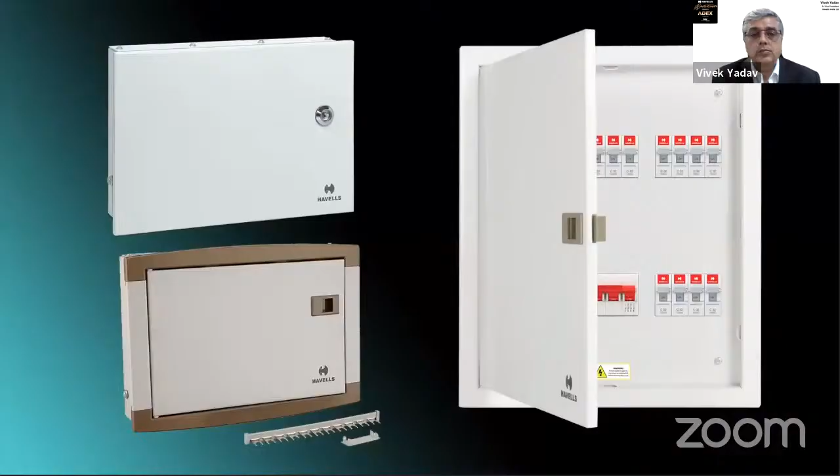For more than 6 decades, Havells India Limited has been focusing on building a better future, a future where technology is used to drive progress, improve business outcomes, and create a better quality of life. Today, Havells stands tall in the FMEG sector as a major power distribution equipment manufacturer with a strong global footprint, owing to its innovative, future-ready products for a wide spectrum of applications.

With the acquisition of Lloyd in 2017, Havells has made a foray into the high-potential consumer durable segment with offerings of air conditioners, LED televisions, washing machines, refrigerators, and dishwashers. The new synergy further complements the brand's deeper-into-homes vision. Havells owns some of the most prestigious global brands like Crabtree, Lloyd, Standard, and REO.

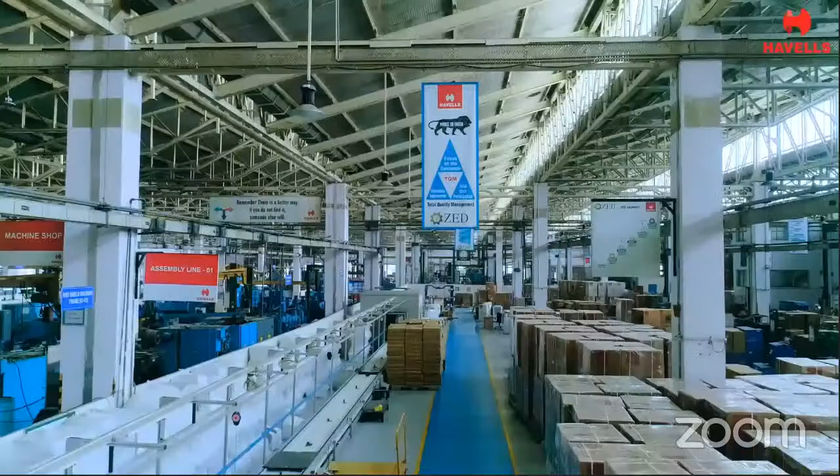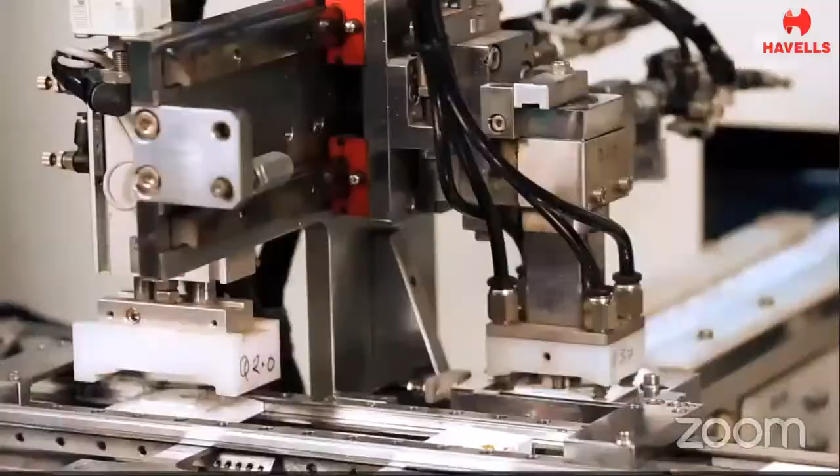Its global network constitutes over 5,000 professionals across its offices. As part of its Make in India philosophy, Havells is manufacturing 97% of its products in-house. With 14 state-of-the-art, fully automated manufacturing plants located across India, Havells offers superior quality and globally benchmarked products to its customers.

Havells has set up a large distribution network to set new benchmarks in prompt delivery and service to customers. Over 11,000 dealers, 150,000 retailers, and 700 plus Havells Galaxy exclusive brand showrooms across the country are helping customers choose from its wide range of products. Havells has a robust supply chain management system with 31 warehouses located pan-India. The meticulous forecasting and demand planning delivers a seamless tracking system.

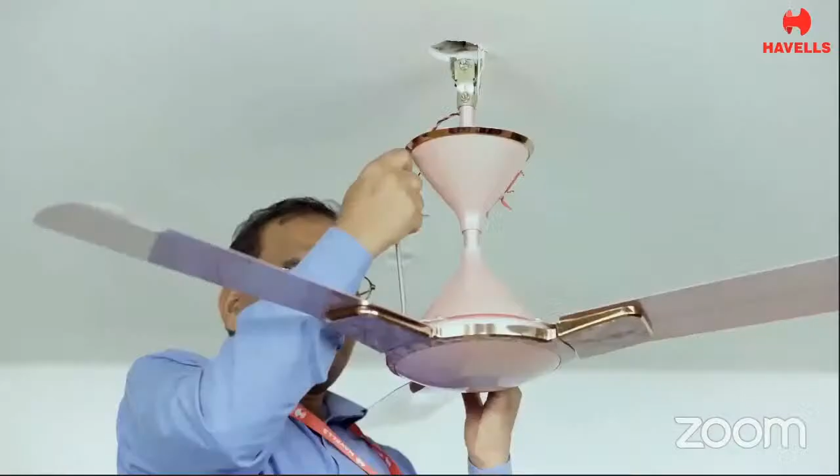Havells is the first FMEG company to offer doorstep service, offering a seamless post-purchase experience. It has the largest service network with 800 plus service points covering 441 towns, 24/7 across India.

Havells Center for Research and Innovation, CRI, at Noida, with a team of highly qualified engineers and designers, continuously works towards creating differentiated and innovative products while adhering to stringent quality norms at par with international standards.

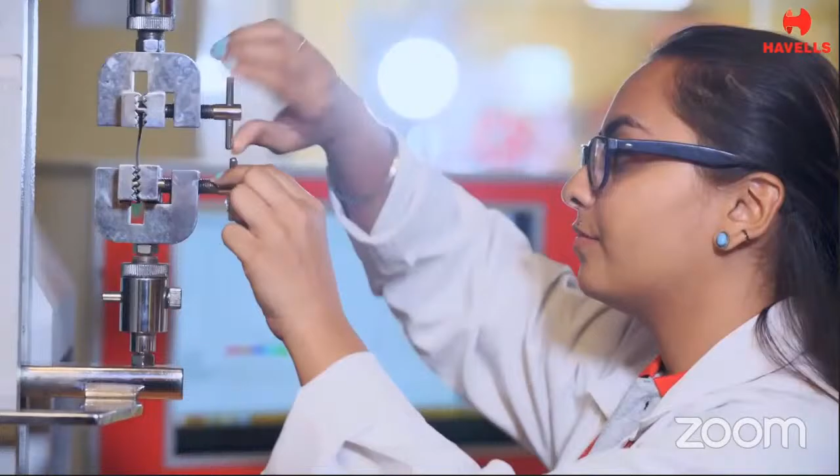Havells products are certified by nationally accredited laboratories such as CPRI and ERDA.

Havells has a strong in-house IT vertical which develops innovative technology platforms to support its robust service and supply chain management system. Growing together is ingrained in the ethos of Havells, and this has resulted in launching many innovative and profitable schemes for its dealer community.

Havells has strong credentials in B2B and large government projects as well, such as lighting up Kolkata railway station and partnering with NBCC India Limited to beautify and transform the night view of India's heritage monuments like Humayun's Tomb, as it believes in the philosophy of spearheading the progress of the nation without ignoring the past.

Havells has taken giant strides to create an innovative world full of possibilities, not only for itself, but also for all its channel partners and customers, with a commitment to improve people's lives and help create a better global society. Havells is inspiring the world and making a difference.

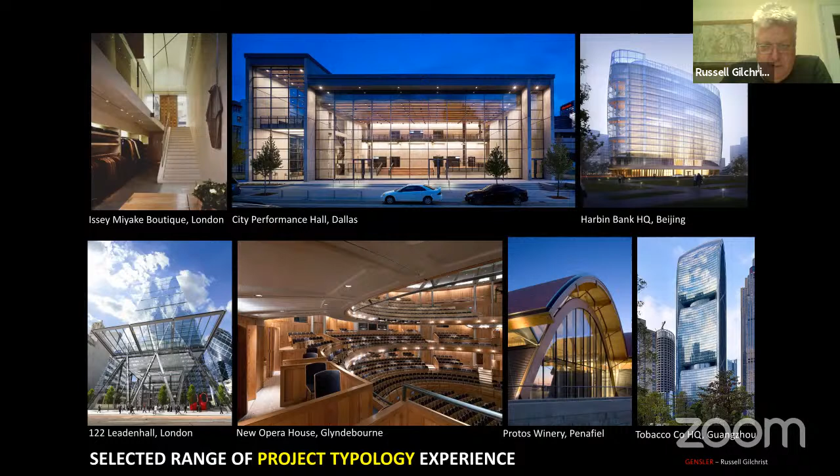I thought I would include this slide because I hadn't quite realized that I'd been repositioning buildings for some time. So when I was a very young architect in the mid-'80s, there was an old tobacco warehouse in London, Butler's Wharf, and we converted that into a design museum. It's since moved from there, but that was my very early foray into repositioning buildings.

Another building was not a landmark building, but it had a very interesting terracotta facade. This was a competition at the time. We were one of 6 architects to compete, and our solution was the only one that retained the facade, even though we didn't technically have to. We kind of saw it as a very characteristic building, one that people had a history with, and we didn't see that we should knock it down if we could protect it, keep it, and build around it.

Repositioning work takes many forms. We're doing a lot of project work in Chicago where we're repositioning lobbies that were maybe 30, 40 years old and need a refresh, and we're doing tenant amenities.

I've currently got one just under construction now in Detroit. It's an old book depository building where they stored books, naturally, which is actually a project for Ford, for some of their incubator kind of companies. It's a 3-story mini version of the post office, much smaller, but similar challenges. That's an ongoing project that should be complete in about 18 months.

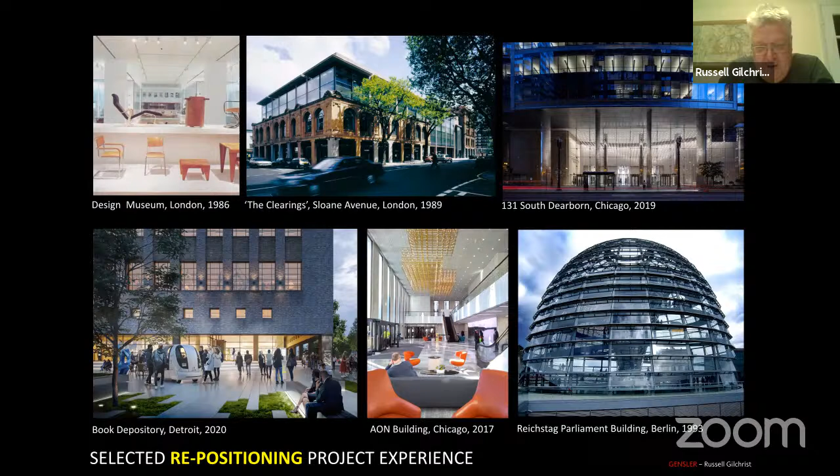Also, I think Sapna mentioned this, I had a brief spell at Foster's where we repositioned the Reichstag into the Parliament building, the current Parliament building. So again, very varied experience.

But I want to talk to you about the old Chicago post office. We call it awakening a sleeping giant. The Chicago practice of Gensler is also repositioning the Willis Tower, which is literally across the water on the other side of the river here.

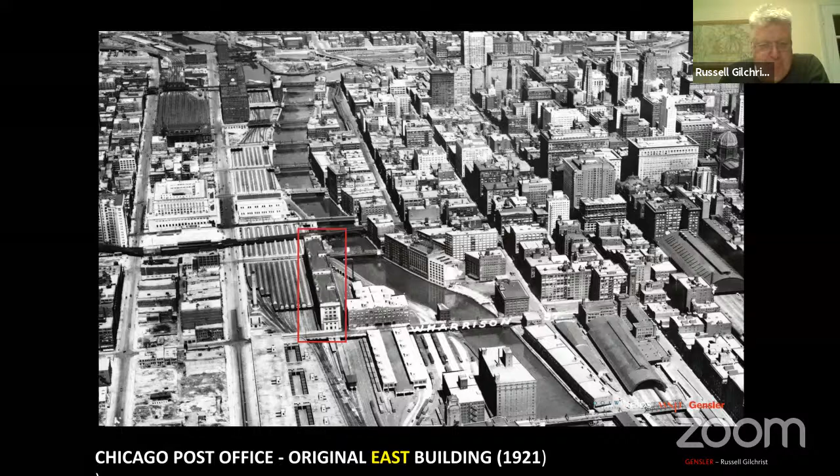But there were 2 later additions, because the post office is in fact actually 3 different buildings. There's an East Building, a North Building, and a South Building. Again, more of that later.

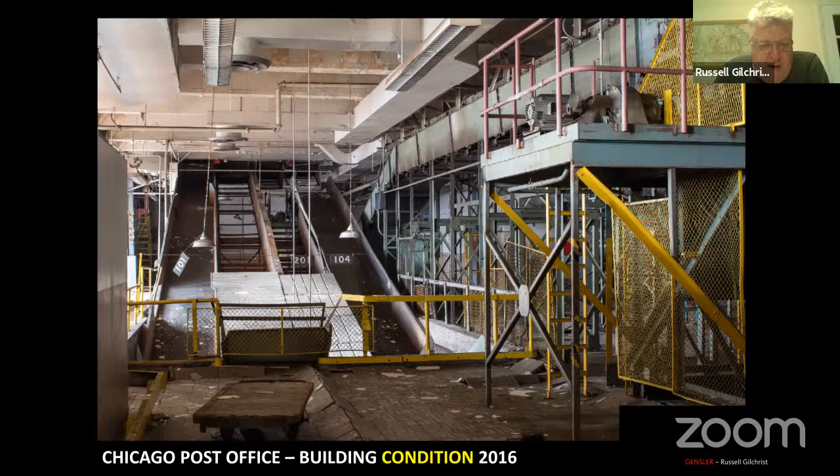We also inherited a lot of scrap metal in this project. As you can see, there was a lot of equipment that was just left there. You can see the kind of state that the building was in.

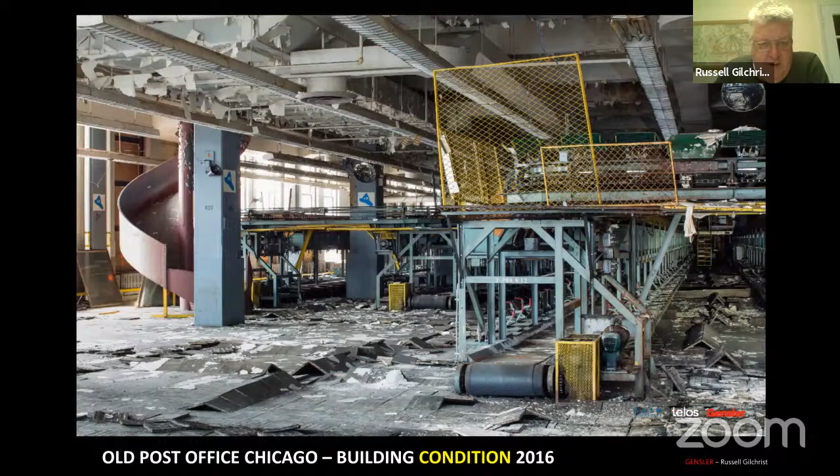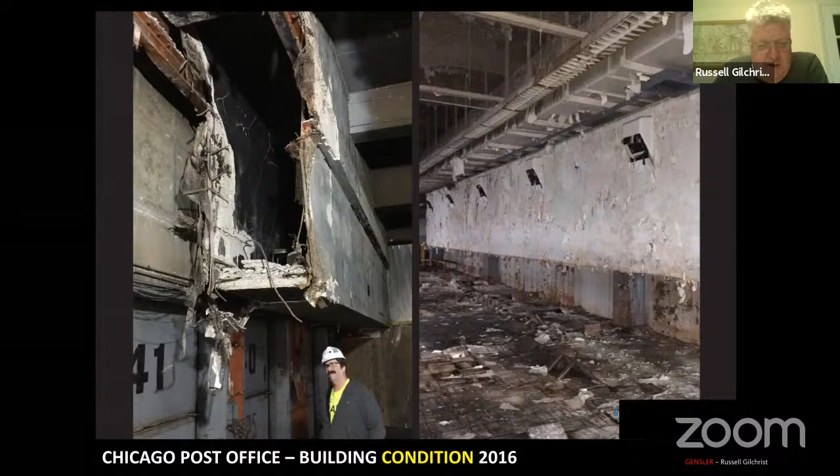Landmarks Illinois and the National Parks, who control how much preservation we have to do on this project, were very keen for us to preserve exactly this and the historical relevance of some of these features, even though they don't really have any great significance in terms of commercial office space that people want to lease.

Again, you can see a lot of water damage. These are actually timber floors that have curled up because there was so much moisture and mold in the building.

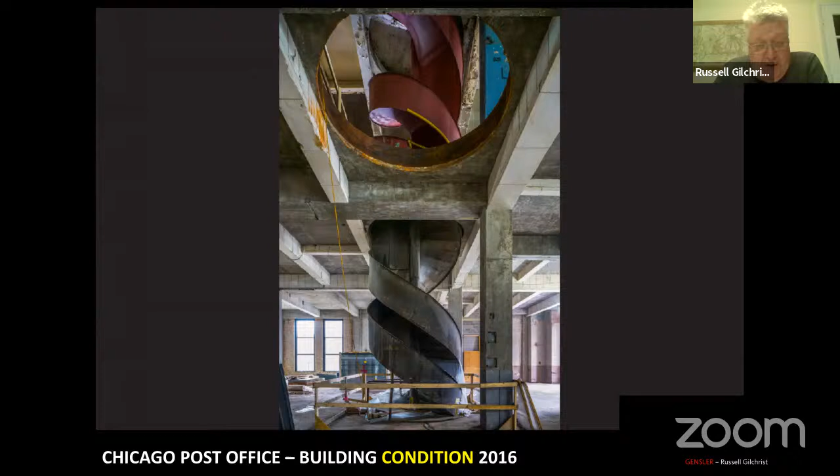Lots of connecting spirals—it was a postal sorting office after all. So the quickest way to get packages sorted from one floor to the other was to use these chutes. Some of these chutes we've actually accommodated within the building, again at the request of the National Parks and Landmarks Illinois.

The guy on the left was actually our construction manager—he's standing on some scales. There were a lot of artifacts, and we were going to have a museum of some of these items. We scrapped that idea in the end, but we are keeping some of the artifacts that existed in the post office building.

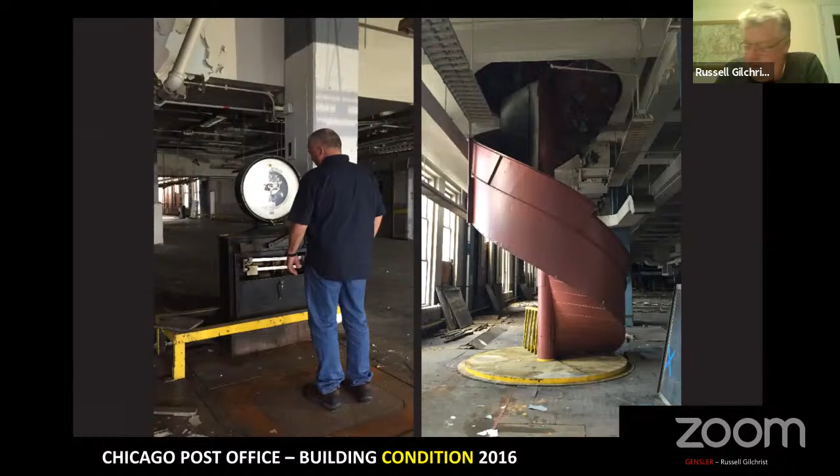One thing that does remain intact is the old postmaster suite, a relic from 1932. It was in remarkably good condition and needed very little renovation, but it has been renovated and upgraded. This is actually in the north building, which we call the admin building. The south building was mainly big sorting office floors, and you'll see when I come to a section in a moment the relationships of the various floor levels, because not many of them match up or are contiguous.

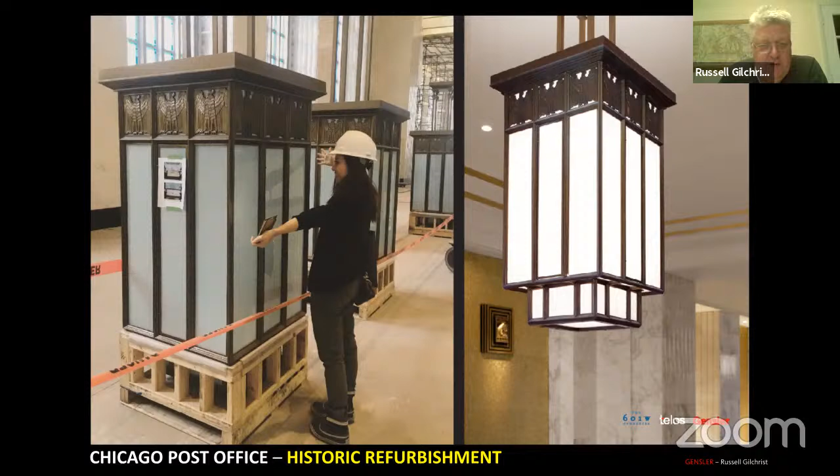This is one of my Gensler colleagues. We had to completely rebuild the light fittings, pretty much from scratch. You can see they're pretty big, but they've been fully restored in this space. There are lots of little artifacts, as you'd expect from a 1930s building—a series of plaques, originally done in gold leaf, showing the various forms of transport.

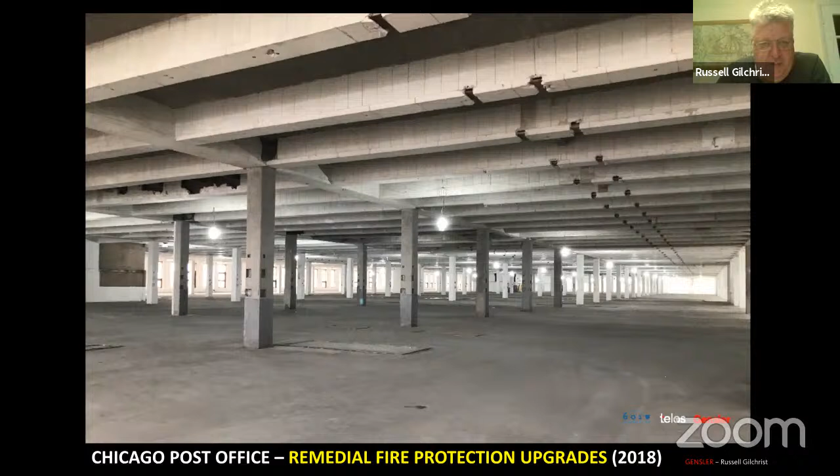This is one of the refurbished galleries, prior to being refurbished, but cleaned up. It's actually been repainted now and looks a bit better than this. These were one of the galleys adjacent to the north building that we had to keep.

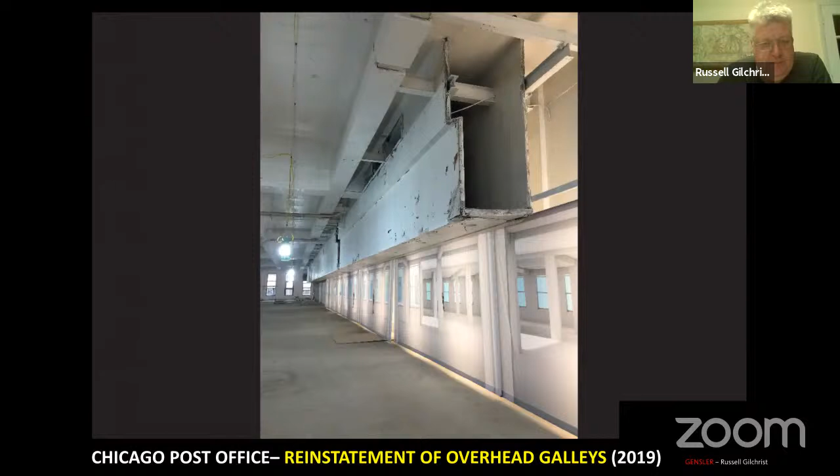Here you can see some of the windows. Again, this is in the main sorting office, a 19-foot high space. The actual bones of the building, when we dried it out, was in pretty good condition.

But our building services engineers reckoned there was enough moisture in the fabric of the building, the brickwork and the concrete, to fill an Olympic-sized swimming pool. So it took us about 6.5 months to dry out the building. At the time, there were no windows in it. We had fans in there, and we were just trying our best to dry out the building.

There's over 2,000 new windows. Again, Landmarks and the National Parks insisted that we match the existing profiles of the original 1930s windows, which is pretty tough because they were steel and single glazed. But we managed to get within 1/8 of an inch, or 3 millimeters, of the existing profiles in aluminium, and they're obviously double glazed. They're not operable because that would have affected the internal building environment.

And just to give you - sorry, this is an American football field, so not a soccer pitch - but this gives you some idea of the scale of this building. You can put 4 NFL football pitches on top of the roof. And I'll get to the roof a little bit later on, because we have actually landscaped it.

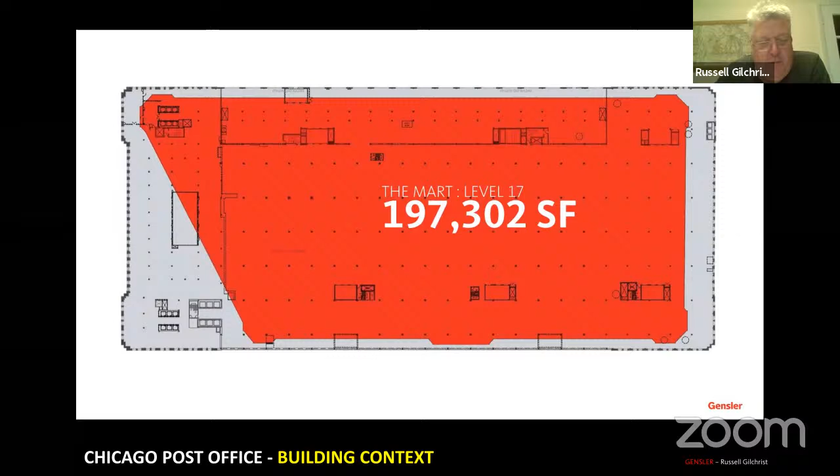At the time of it being built, the post office was the largest. The Merchandise Mart usurped it and was almost twice the size, but it's smaller in footprint. That footprint fits inside the post office footprint.

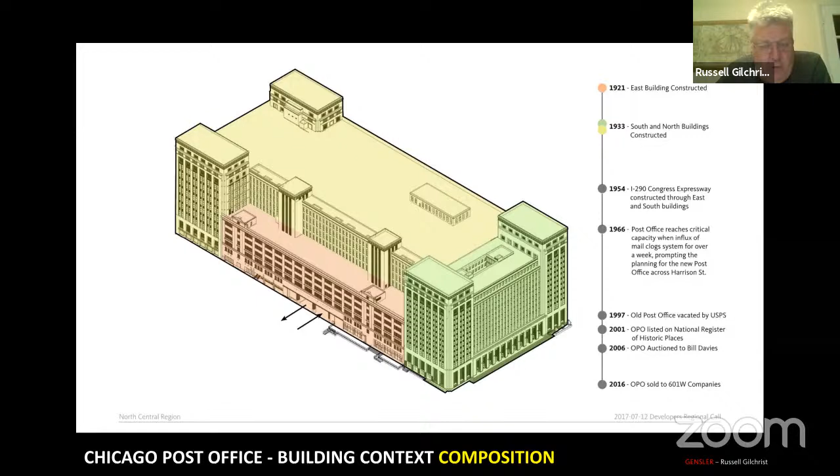So I've got a few little diagrams here that just give you a recap of how the building has emerged over the years. The slightly light pink color is the old existing building. The green building to the right is what we call the North Building. And the yellow piece is the larger floor-to-floor height South Building, as we call it.

And how we started to strategize, because this is essentially predominantly an office for tech companies primarily, not exclusively, with some amenities, which I will take you through. At the ground level, there's obviously the main entrance hall, but there's some F&B and some retail, service retail at the base of the ground floor level.

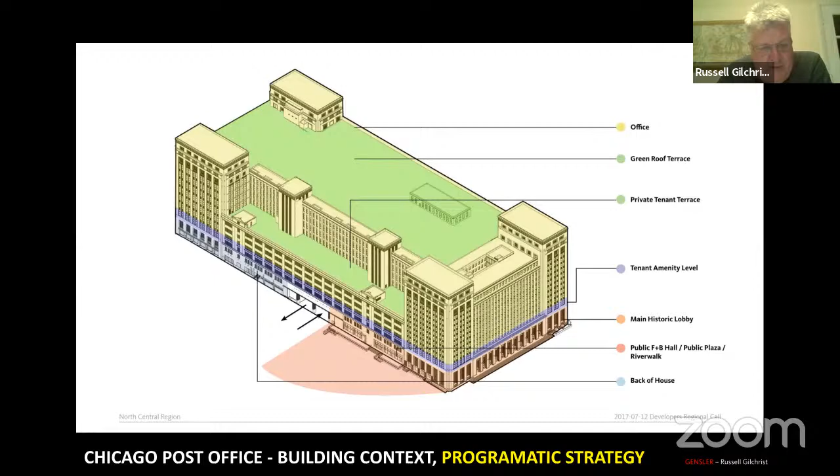And the space on the other side of Congress, to the left of where you see the arrows, which the traffic is driven through, is all of our back-of-house space, where we have boilers, mechanical plant, and actually car parking.

But the main way that we are connecting the north of the building to the south is via the second level, not the grade level, because you cannot cross the highway - it's a 6-lane highway. So there's an escalator sequence that takes you up to level 2, and level 2 is the only floor where all 3 buildings are contiguous. Every other floor level does not have contiguous floor plates.

Some of them, the south and the east might match up, or the south and the north might match up, but all 3 floor plates only match up at the level 2 datum.

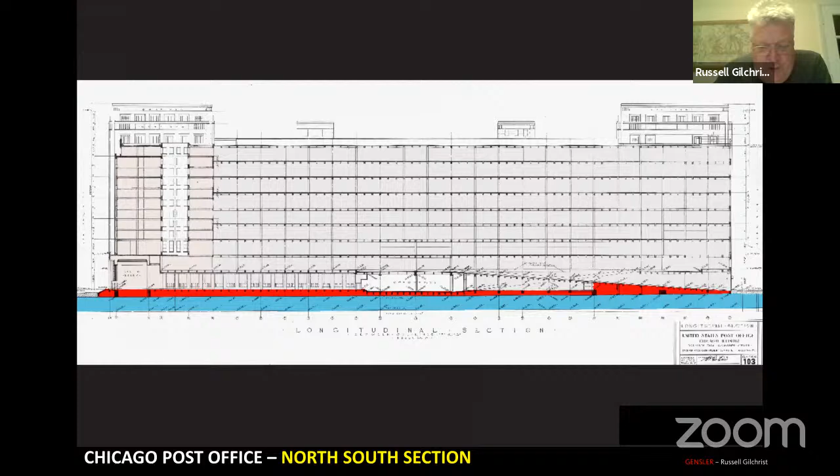So this is one of our major challenges: how do we actually redistribute passenger elevators throughout the length of this floor plate in a logical and efficient manner. So what we did is we took largely a lot of the freight elevators out. We kept some to the top right-hand side where the loading bay is, to give you access to all the floor levels, but we had to redistribute. It's still fairly uneven because 18 of the 27 elevators ended up being on the north side of the building, so the other 9 were distributed around the other two-thirds of the building.

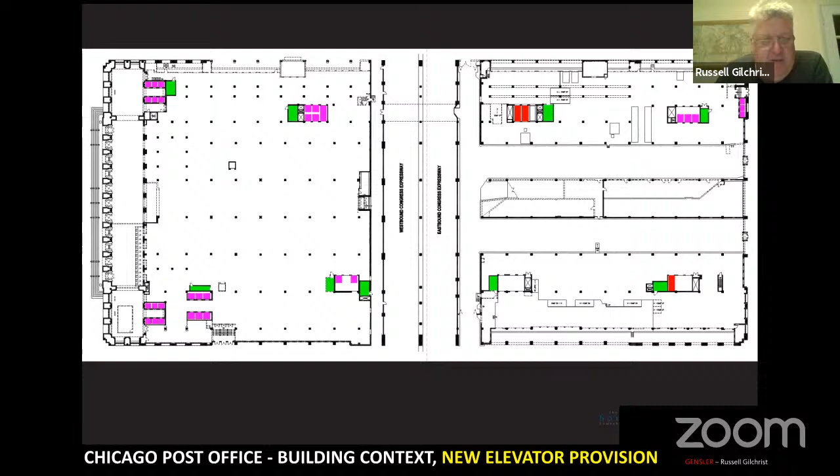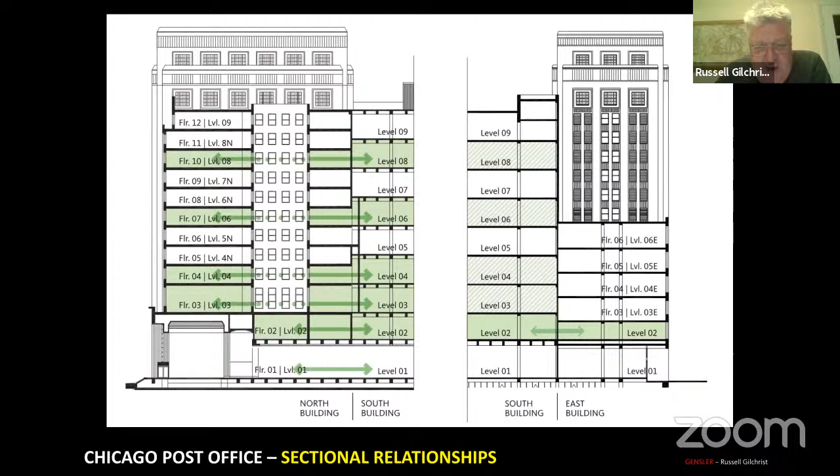There's a little diagram that's just showing you—the one on the left is cut north-south. Because the north building and the south building were built at the same time, you can pretty much see that 2 levels of the sorting office area, the 19-foot floor-to-floors, actually equate to 3 levels of the office building in the north building. So at least we have some ability every 3rd level to connect everything up. But you can see on the south building and the east building, which is only 6 stories, it's got lower floor levels. The east building is 6 levels, the north building is 12 levels, and the south building is 9 levels, so you can see that it's only at level 2 that everything matches up. And the east building and the south building go out of sync in no real logical manner, which presents an interesting challenge when we're trying to make floor plates contiguous.

The selling point from the client was to be able to provide Chicago with large floor plates—250,000 square feet potentially on the lower levels, 200,000 square feet on the upper levels. We did many, many different space plans for all of this. This was theoretical for us because Gensler at the time was only engaged in the shell and core.

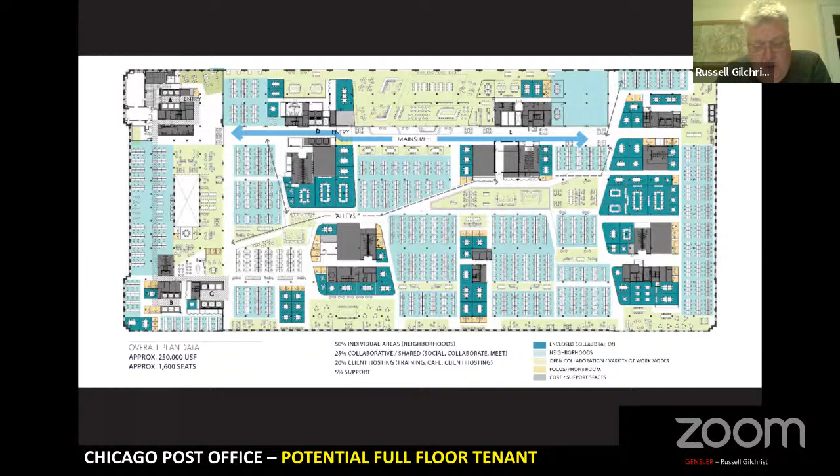We did various kinds of options to show how the space might be used. We did numerous—I'm showing 3 here, but we must have done at least 30.

Another characteristic or interesting piece of this is the building is very, very heavily protected, and the national parks and landmarks would not let us touch the building. But on the west side of the post office, we do have the ability to give a main anchor tenant their own dedicated front lobby. Everybody else will be coming through the north lobby, the one you've already seen that's been refurbished. But if we had a tenant taking a sufficient amount of space, we could give them their own dedicated lobby with a canopy and a drop-off. But the canopy would not be allowed to touch, or would very minimally touch, the existing limestone fabric.

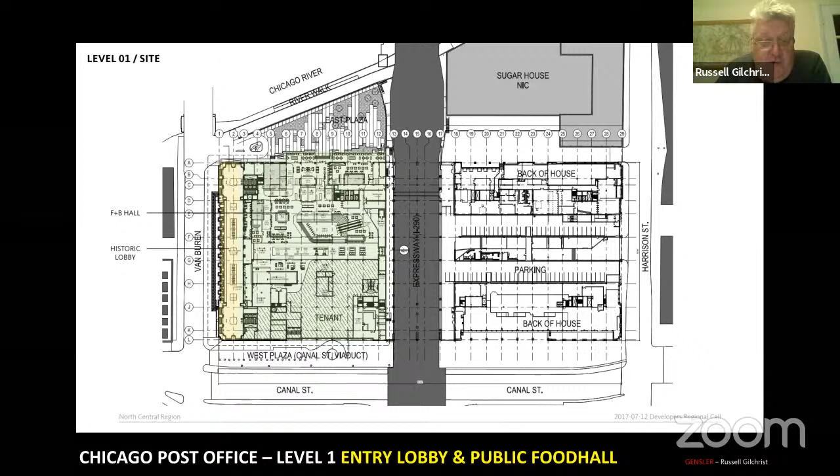You can see that this is mainly back of house, and it's parking. We do have 189 parking stalls on site, and lots of amenities in the building.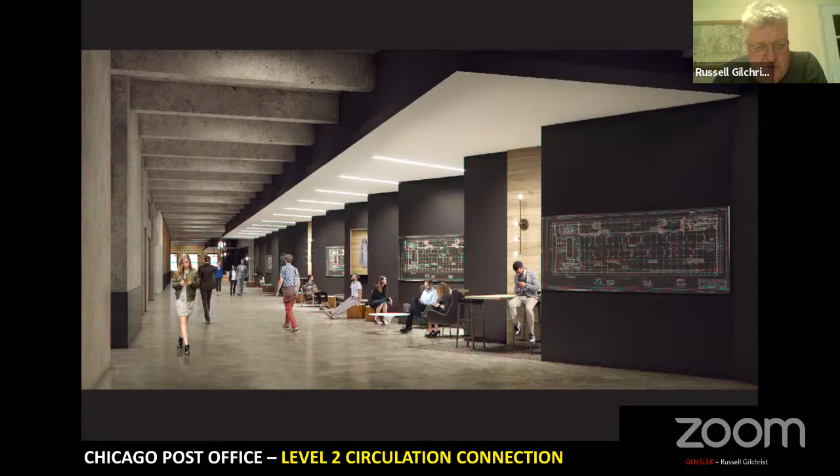The strategy that the leasing agents and the client had is they did not want tenants smaller than 100,000 square feet, or 10,000 square meters.

So, amenities - and I'm sure I'll get lots of questions on this later on.

What am I doing for time? I think I'm going to be okay.

We had a lot of debate about what tenant amenities we should include. Obviously, a tenant lounge is a must. This building is going to house probably 12 to 13,000 people. But it's very difficult to know what to do speculatively. So we had a lot of debate about what specific tenant amenities we should do day one, and what we should try to fold in later on. I'm going to take you through some of those.

We do have a tenant library. This is a device-free zone that all tenants can use. It's not open to the public, just for tenants only. This is all on the second floor level.